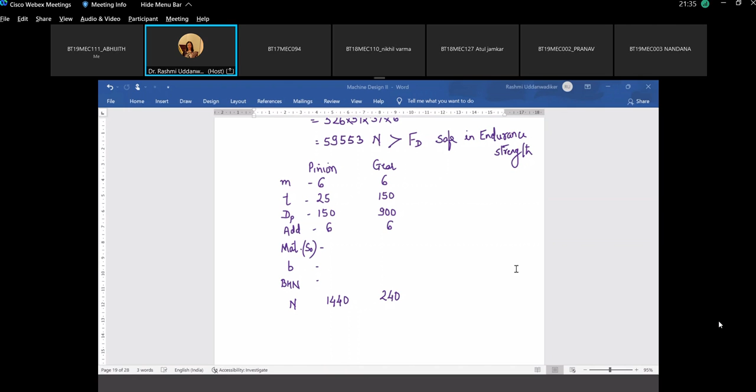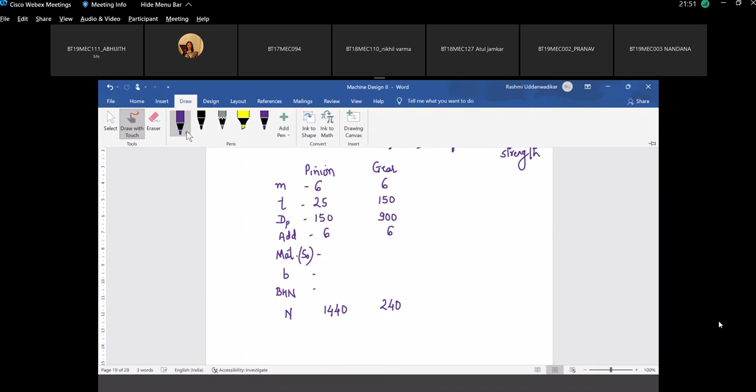Okay, which color looks more prominent on the screen? This indigo, black, blue, red. Ayush, whatever color I'm using, is that okay?

Okay, let's start. Today I want to complete this topic, spur gear design.

If the rating is 45, then will it require power? 42, and will it supply total 45? If the rating is 45 and it supplies, what is this? Although the question is not very clear, the required power is 42 and the motor rating is 45. This is your question, right, Saurabh?

Yes ma'am. Okay, normally for a 45 kilowatt motor, which is the rated power, the design is always done for a little higher than that. We have used a service factor of 1.5, which makes the design power 67.5. This means even if the power required exceeds 45, say 50 kilowatts, it will supply that much power. But 45 kilowatts is something it will definitely supply.

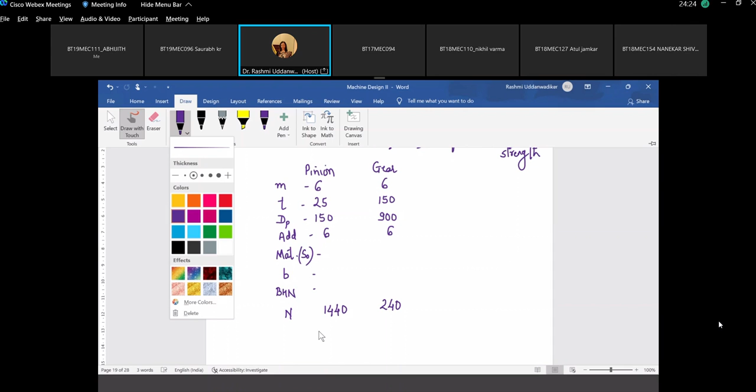To share an example, we were working on an energy audit kind of consultancy for one of the textile industries near Nagpur, at a place called Saoner. They are into the textile business, and their problem was their electricity bill was coming to a few lakhs every month, some 2 or 3 lakhs, and they wanted us to check where exactly the losses were. So we had a team of 3-4 professors, two from electrical and two from mechanical, and we realized they had not changed their motor for so many years. Almost 20 years they had been using the same motor, which means the losses are very high and the efficiency is pretty low.

As per our consultancy recommendation, we asked them to simply change the motor. Now changing the motor will be an initial cost, a one-time cost, but that would save their power by 30%. So 30% saving is huge. And they were saying that they are simply changing the motor windings.

You have studied in electrical engineering that a motor will have a stator and a rotor, and it will have those copper windings. So if that is changed, it is like servicing your vehicle, but it is still an old vehicle, right? You also know that these days on the roads, any vehicle more than 15 years old, the RTO will not give a green clearance. That's because after 15 years of continuous operation, the vehicle, the gearbox, the engine, the belt drives, all the shafts, all the joints will undergo wear and tear, and its performance on the road decreases. The pollution would increase. So it is better to replace that vehicle instead of simply getting it serviced or overhauled.

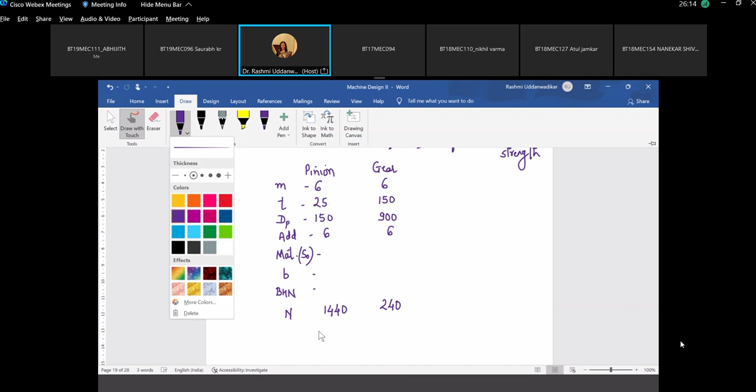Is that clear? Pretty big answer, I guess, for the small question.

So today we are going to discuss the second part of this two-stage gear transmission. I'll go a bit faster for the second part. Somebody is asking - so it will be more like revising whatever we have done in part one, and then we'll design the gear, the hub, and the shaft. This should also include shaft design, which will hold true for belt pulleys also, for bearings also. You have to design the shaft. Well, let's start with the second part of the design for the gear P2G2.

Now I am expecting answers from all of you. Quickly tell me what are the values for RPM available at the shaft.

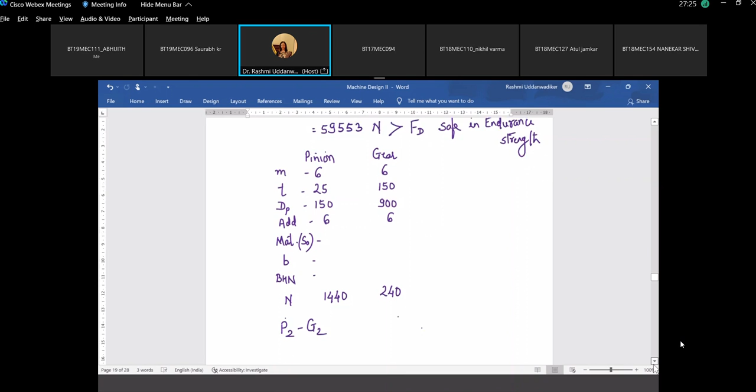We had a motor, and on this motor there was a pinion which we had already designed, meshing with another gear. Here the speed was reduced from 1440 RPM to 240. At the next stage, this was P1 pinion, gear G1, and then you have P2G2 operating a drum, and this rotating drum is lifting the weight.

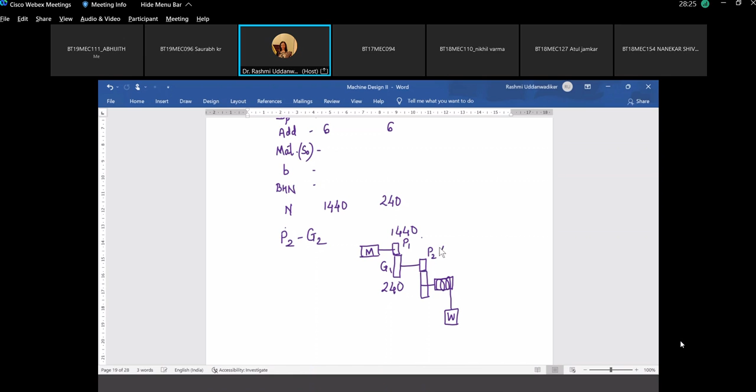So this pinion P2 is again rotating at 240 RPM because it is mounted on the same shaft, and this gear G2 is rotating at 42.4 RPM.

And what is the power available here at this shaft? Whatever power is here, you divide it by efficiency, or reduce it and multiply with the efficiency, 98%. So what is the power available here?

Forty-four kilowatt. The design power available here was- we gave the motor 45 kilowatt, right? This motor is 45 kilowatt. Now we are starting from here.

If this is a 45 kilowatt motor with the service conditions saying service factor is 1.5, what was the PD of this motor in the first part of the problem? 45 kilowatt into the service factor gave 67.5.

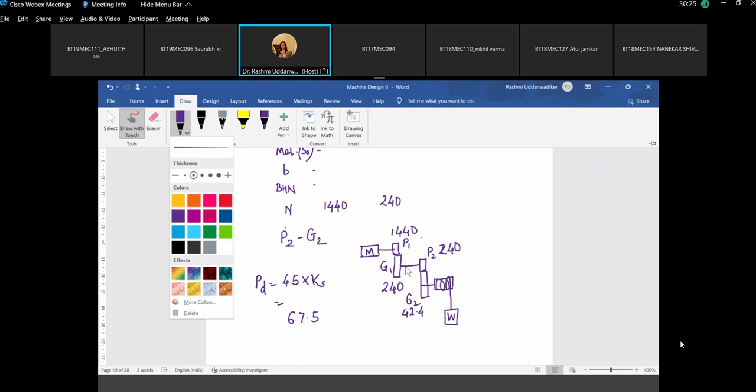So how much would be the losses from shaft 1 to shaft 2 because of the gear drive? What is the efficiency of the gear drive? I told you- what efficiency did we assume? 98%. So how much would the power reduce from here to here? You multiply it with 98%.

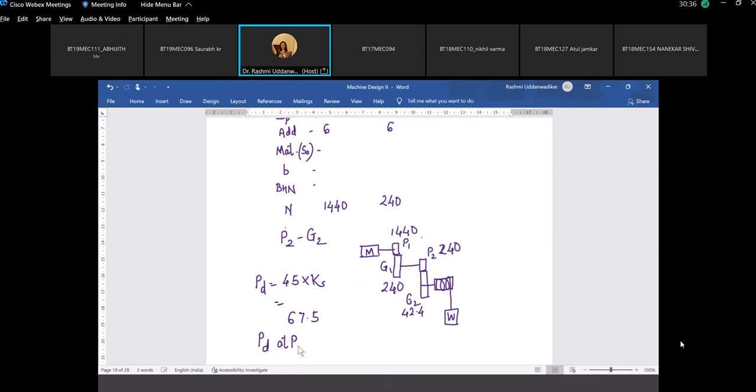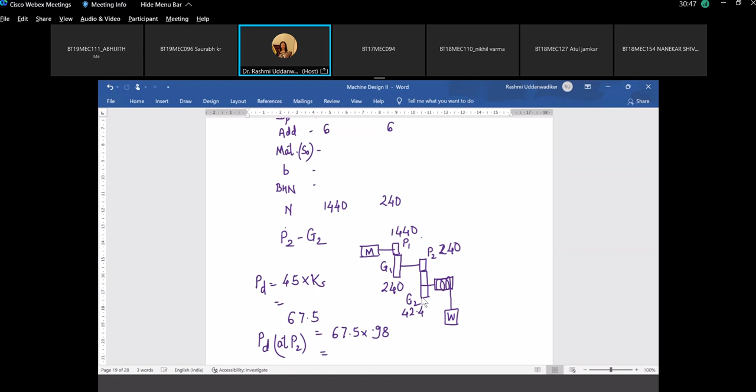So the power available at shaft 2, or at pinion P2- you multiply it with 98% and this would be the power available at shaft 2: 66.1. Should I take it as 66 for ease?

Let me quickly revise. We had some load acting here, and we knew the rotating shaft diameter and its linear speed, from which we calculated what power is required at this drum or the elevator. From here we divided by the efficiency of this gear pair and the efficiency of that gear pair, and we got a value around 41 kilowatt required at the motor.

Since 41.5 is not a standard motor rating, we selected a 45 kilowatt motor. So with this rating and the given service conditions, we multiplied by the service factor and got 67.5 kilowatt as the design power for this motor or the entire assembly.

And since we have designed P1G1 for 67.5, we continue with the same design power. You can slightly reduce it because of the gear drive's 2% loss, so the power available here is 66.15 kilowatt, okay.

Should we proceed from here? What is the next step? Design the pinion. Before that, what is the tangential load? PD upon velocity of this pinion P2. For getting the velocity of pinion P2, we need the diameter of pinion P2, for which we need the module. So let us assume the module is M.

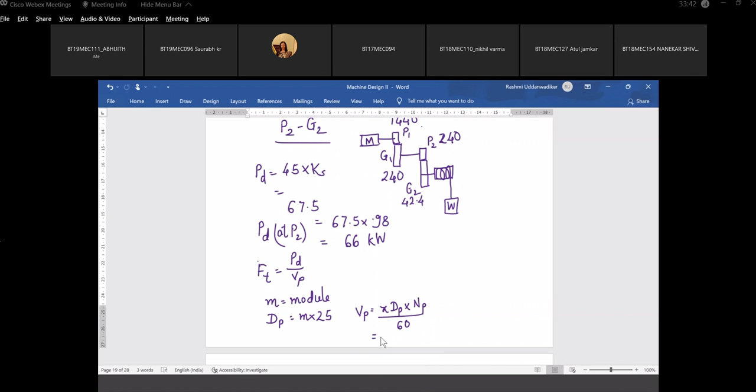So what is the peripheral velocity? RPM is 240, dp is 25m in millimeters. Pitch circle diameter of the pinion into the speed in RPM by 60- this gives 0.314 times m. What is the unit? Meter per second, good.

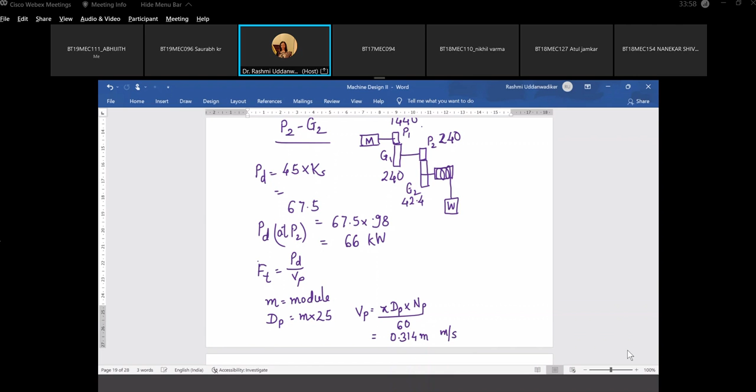Next, give me FT in newtons. PD you know is 66 kilowatt, convert it into watts, upon peripheral velocity. Something by m- give me that something. 211, 210.

Why this variation, if you're using 0.314 and 66? 210, okay, 10 cube.

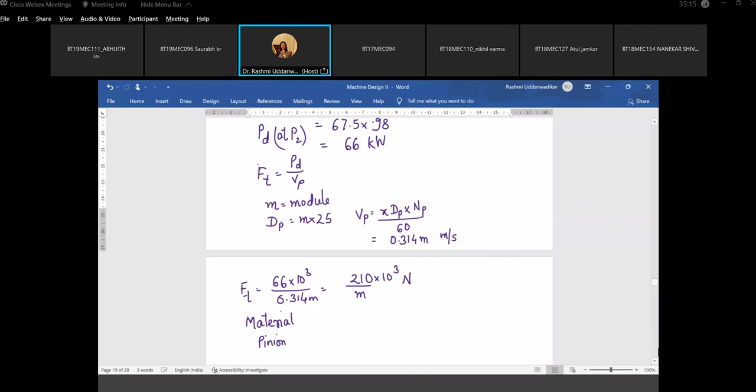What next? We select material. Give me material for pinion and for gear, referring the design data book. We can use the same material as in the first stage, or you might go with some other material. What do you want, same? Same, okay good. So for pinion we used SAE 1045.

Forged carbon steel SAE 1045. What is the value of S naught? 210. And for gear we used cast steel, S naught 196, okay.

Number of teeth: for pinion, number of teeth is 25. So what is the number of teeth on gear? What is the velocity ratio? The velocity ratio is 5.6, which gives number of teeth as 142. Ratio of their RPMs is inversely proportional to ratio of their teeth.

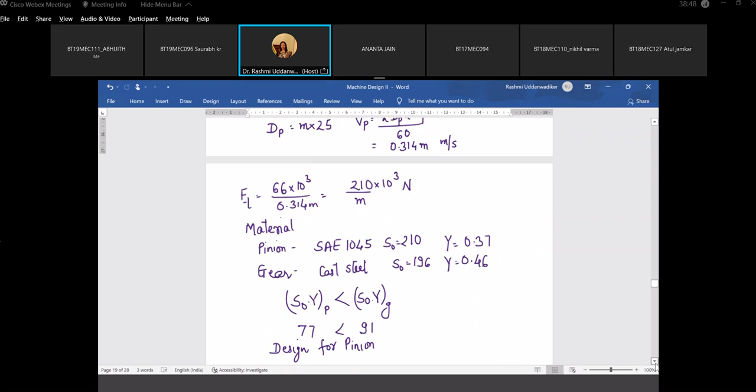What is the next step? Good, 77 and 90, correct? Yes. What is the next step? Once we know that we are designing for pinion, we have to find the beam strength for the pinion. And the formula goes as S naught into Y into B, M and CV.

Value of VP is not known, so we cannot calculate CV, but we can assume CV based on the RPM of pinion. Pinion is rotating at 240 RPM. So by thumb rule, what is the value of CV? If it is less than 1000 RPM, we take CV as 0.4.

Well, and what is the range for B? Range for B is 9.5 times of M to 12.5 times of M, and you can take any value in between, but normally we take 10 times of M. I repeat, you can even go with 9 times of M or 12 times of M, but this is just for ease that we are taking a round figure.

So S naught is known, Y is known for pinion, it is 77. This is 10 M into 0.4. So give me what is FB in terms of M square - something into M square. I'm going very fast because this is more of a revision kind, but the same design we have already done in the first part of this assembly.

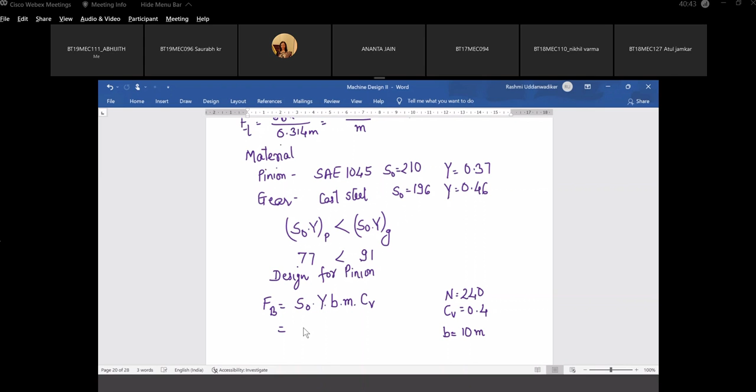Is that 310? Okay, 310 M square, 0.8. What next? What is the next step? How do we get the value of M?

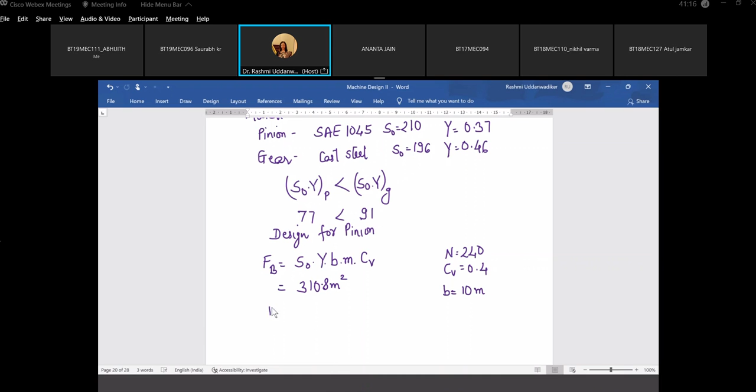We equate FB with FT. FB should be ideally greater than equal to FT. Equate these two terms and give me the value of module.

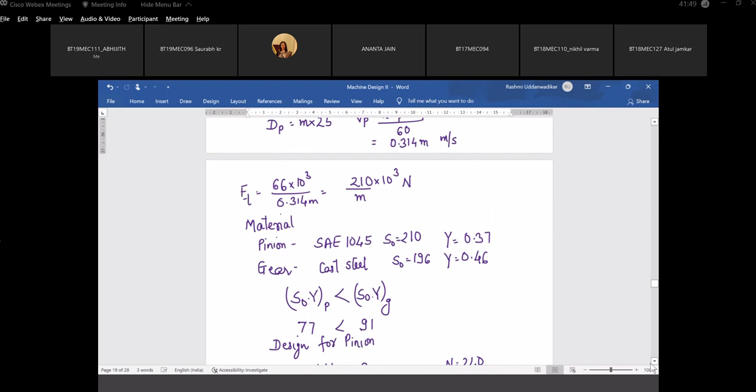FT is 210 into 10 cube by M. Make sure your values are in newtons. So it's 310.8 M square. This is in Newton because this is in millimeters, and this is in Newton per mm square. Equated to 210 into 10 cube. So what is the nearest value for M from the data book?

If M is 8.7, you will get 0.87 if you have not converted kilonewtons to Newton. Sushmita, make sure you are converting the units. So the next value from the preferred choice is 10 or 9. Saurabh? Okay, 10, ma'am. 10. Okay, so from data book, we are picking up M equal to 10.

Now, once this is final, get the value of pitch circle diameter of the pinion. Give me what is VP. Give me what is CV, and give me what is FT.

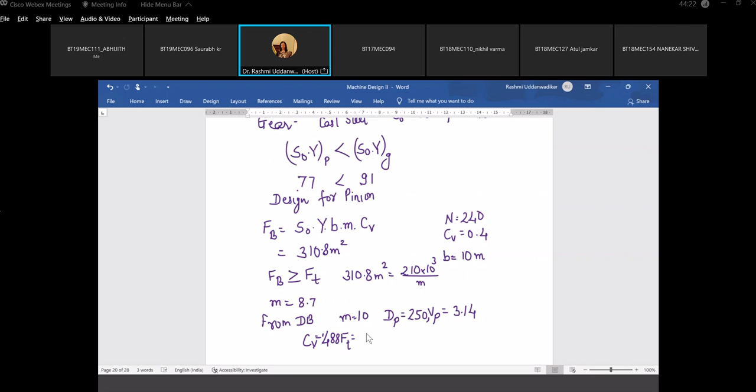Which means we had to consider only the beam strength as 48% of the actual, whereas with N240 we assume CV as 0.4, which means we assume beam strength is reduced to 40% of original, whereas it is 48% of the original. What is FT in newtons?

FT value 21. Okay, so which means your value of FT was 21178. Okay, let me go with Saurabh. This is FT.

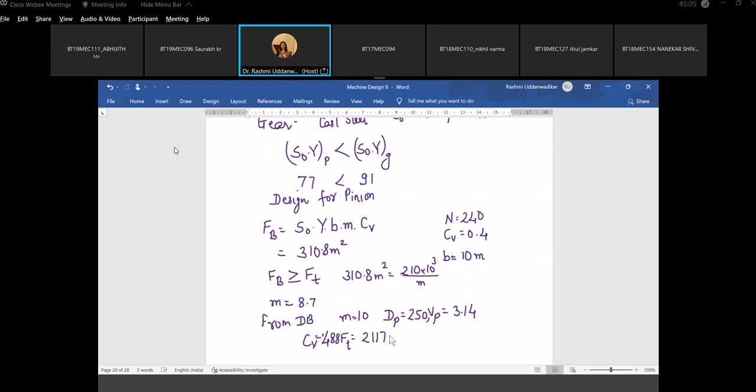What is the next step? What do we check now? B. Good. So now we'll assume FB as this FT.

Which is 21178. S naught remains the same. This does not change. Y remains the same. B we have to calculate. This is unknown now. M value you know. CV is the calculated value 0.488. So this is known, this is known - ye pata hai, ye pata hai.

Give me B, and what do we check from the value of B? What do you check? Whether this calculated value of B is greater than B minimum. It must be greater than B minimum, not less.

Atul, Harshini, Lokesh, I'm not getting answers from you. Okay, so Aditya, your value of B after calculation came out to be how much? 55. Pretty low. What is B minimum?

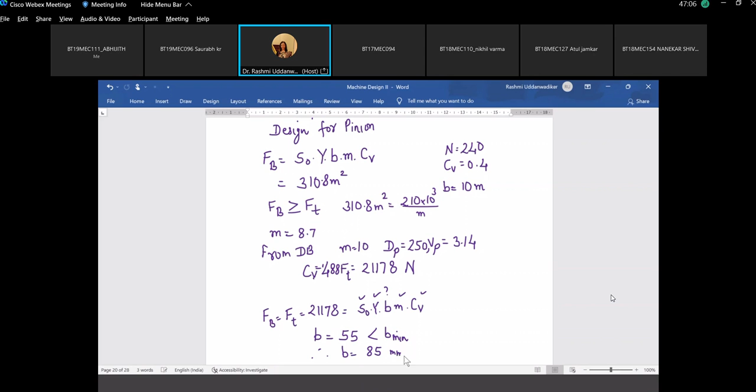B minimum has to be 85. So this is less than B minimum. This will not be safe, and therefore we are assuming B as B minimum, which is 85. We proceed with our design with B equal to B minimum. This value is not acceptable because this is less than B minimum.

So now that you have increased the value of B, which means your FB is definitely greater than this 21178, which also means that now your FB is definitely greater than FT. Now your FB is S naught into Y remains the same. Value of B is increased from 55 to 85, which means FB is also greater.

M is same. So this value is now with CV greater than FT. Give me what is without CV, because now we are going to check with the dynamic load. This is FB sans CV.

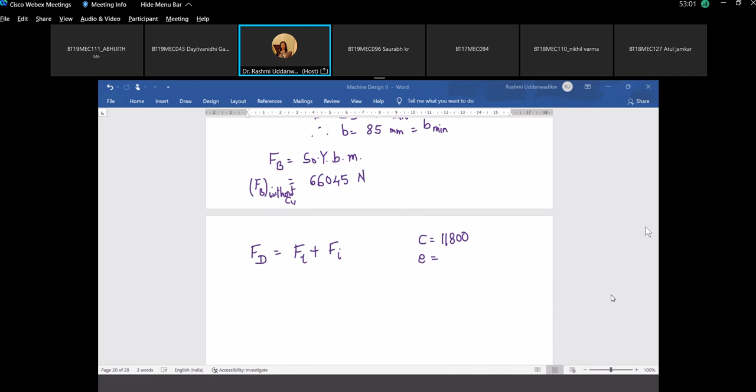What is the value of our velocity? Yes, for CV, we have taken class 1. CV, you have taken class 1. Yes, because the velocity range is lying between 2.5 to 5.

So you understand the meaning of commercially cut - it is done commercially without checking or bothering too much about the errors, and so the error is quite high. Carefully cut gear, as the name indicates, is cut with little more care, and so the error goes down. And precision cut is very precise, and so the errors are minimum.

And what is the permissible error? With class 1 gear, you are getting probable 0.08, and what is the permissible error? 0.1, and 0.08 - this is less.

So ideally, we should write it down as we are going with carefully cut gear. But as of now, let us stick to whatever value we are getting. If it is not coming out to be safe, if this FD value is not coming out to be less than this, then we'll see. Okay, so for now we are going with 0.08 value - probable error 0.08 for class 1 gear. This is what is justified as per the range of the speed.

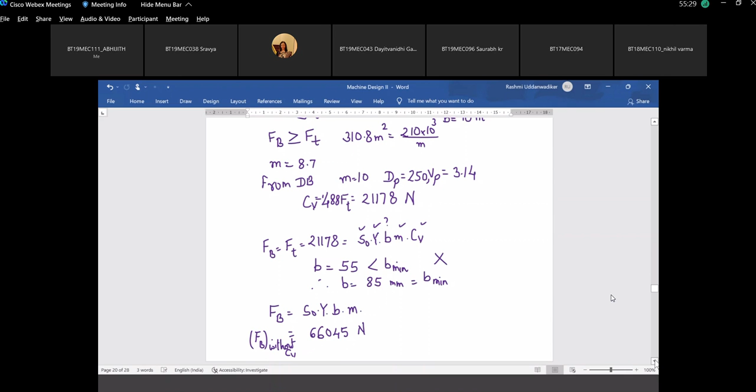So what is FD coming out to be? All we want is it should be less than FB without CV. Probably it is less.

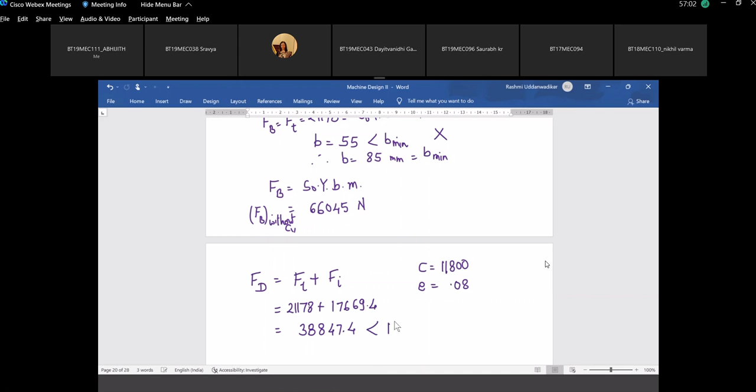Give me FD. 53, oh good. Oh, 88. All of you are getting FD in this range, which is definitely less than FB without CV. This is very important. Here we check it for FB without CV. So this is safe in bending.

Okay, good. You know what is the funny part of this? When you are solving in the class, you will always get safe. When you are doing it in your exams, you will never get safe in first go. So as the joke that goes around in your WhatsApp, what do they teach in class? Very simple model, and what is asked in exam is extremely complicated thing. So it's not done intentionally, but somehow it happens that in first go you never come up with the safe value of FD and FB in exams. It comes in class. So that is good for me, not good for you.

Okay, moving ahead, go for FW. Check for wear, check for endurance. If you can do this in 5 minutes, we can start with the gear blank and the shaft design.

So what do we do for FW? We don't assume K, we equate FW directly with the load and find out the value of K. This is what we did last time. It is the pitch circle diameter of the pinion dp into the face width b into k, which is not known because this depends upon the hardness, into the size factor q, which depends upon tg and tp. So this you know, this is 2 times tg upon tg plus tp.

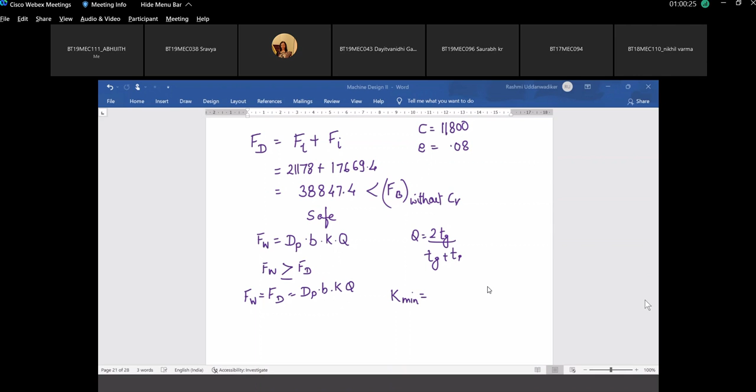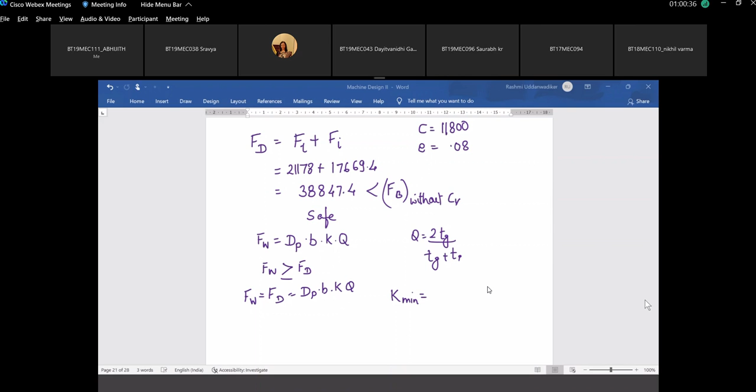K is coming out to be 1.08. Somebody else please confirm. Value of K 1.07. 1.07, 1.08, okay, let's go with this, 1.075. What is the next nearest value higher than this for 20-degree involute full depth? Steel versus steel. What is the next higher value? After 1.07.

20-degree full depth. You are checking for 14.5. Yeah, next higher value is 1.376, which is for what BHN numbers? So from the data book, 300 each, or for 250 and 350. 250 gear, 350 pinion is again giving the same value, or 300 each. So from the data book, we are going with the next value of K, which is 1.376, which will definitely increase your value of FW.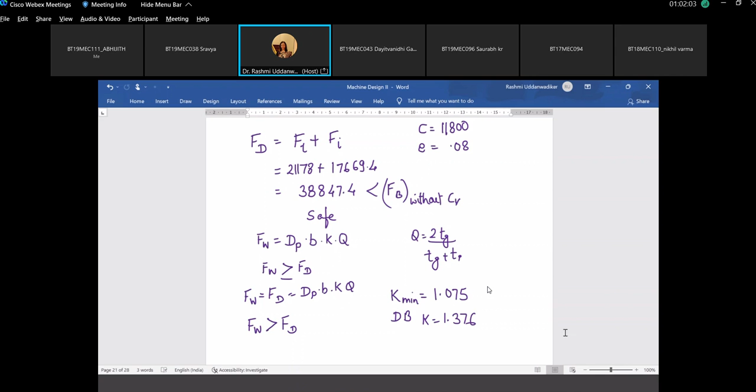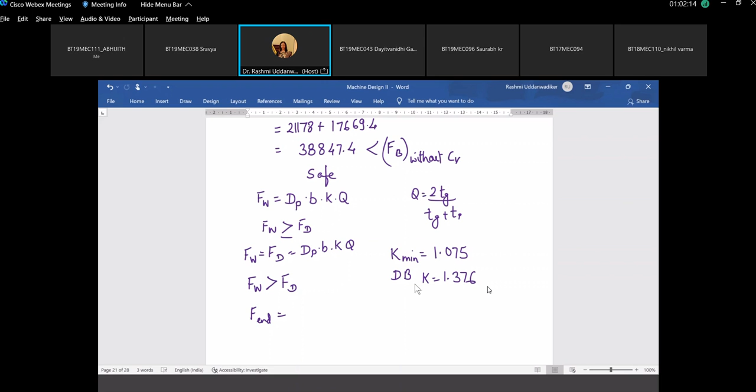This will be greater than FD, because DP is same, B is same, Q is same. K value from 1.07 is increased to 1.37, and so FW is definitely greater than FD. You may check, you may not, this goes with logic. And the last step is F endurance, which again for this value of hardness, where the BHN is 300 each for gear and pinion, you check for endurance and this is going to be safe.

So this part for now I'm skipping because I want to go for the gear blank design. And I have to finish it in next 10 minutes because a few students have requested me to leave the class at least 5 minutes before the next class, and I appreciate that.

Okay, turn the pages, go to the gear blank design. I'm sure F endurance, you know by formula, will come out to be greater than FD. And we say that this is safe in bending, this is safe in wear, and this is safe in endurance.

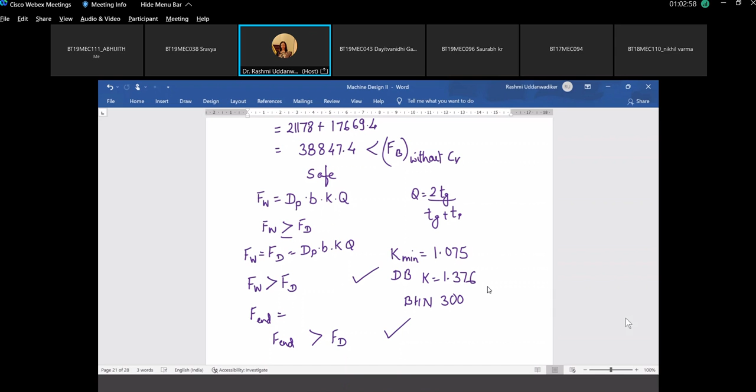Good. Okay, turn to page number 174 as per my book, table 1614. This is giving you the design data for gear blanks. What do you understand by gear blank?

Pratyusha? Vedant? What is a gear blank? Pratyusha is there. Geometry? No.

Gear blank is the solid disc from where the gear teeth are cut. Yes, it's a disc with no teeth. Now there can be three types of construction. One is a solid blank, another is a web construction, and third one is the armed construction. And now what is the difference between these three? Anybody can tell me? There are three constructions given: one is the solid construction, second one is the web construction, and third one is the armed construction.

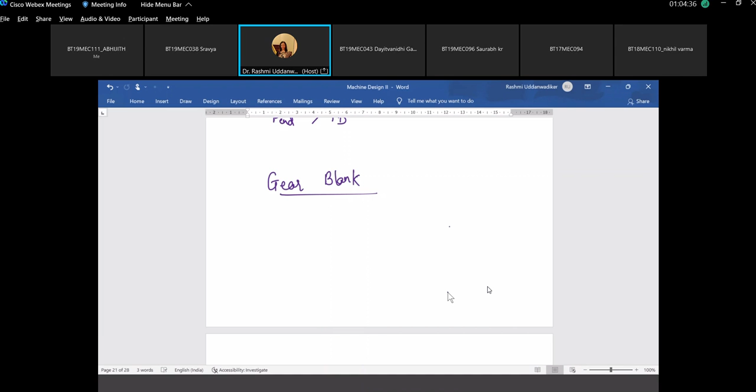Now depending upon what is the size, this type of gear blank is a solid construction and the gear teeth would be cut here on this periphery. This is the web construction. If the diameter of the pinion is of the order of 24 times module plus 80 in mm, or a little less than this, then we go for web construction. If the diameter is less than 15 times module plus 60, we go for solid construction. And what is armed construction?

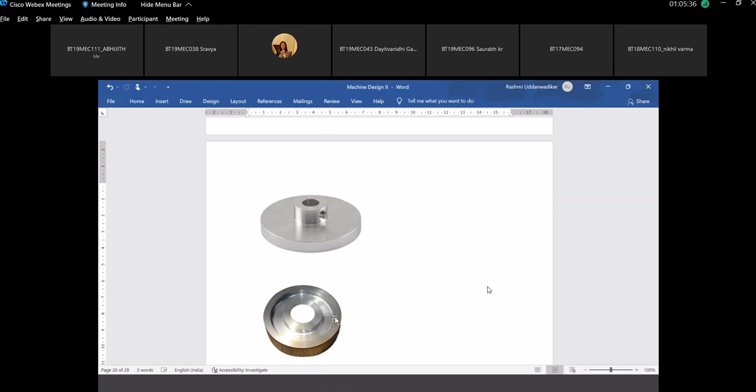What is the DP value given in the data book? Siddharth? What is the value of DP given? Pitch circle diameter for armed construction?

Are you referring to the design data book?

This kind of blank is known as armed construction, where this much amount of material is removed and you simply have arms instead of a solid material here.

And what is the advantage? Another probable question: when would you go for a web construction or armed construction? What is the advantage of armed construction over the web construction? As you can understand, with armed construction there's a reduction of cost, a reduction of material. That is the benefit. But when do we go with this?

If your gear is too small in size, the diameter is as low as less than 15 times of module. In our case, module is 10, so less than 15 times is only 150 mm, which is only 15 centimeters. If this is the size, then cutting arms on this small size will be costly. But for a huge diameter, almost 240 mm, 250 mm, there will be even more saving. There is pretty much saving of material. But if in a small gear you are trying to remove material, then manufacturing becomes costly. So for smaller diameter, solid construction is preferred; for larger diameter, we prefer armed construction.

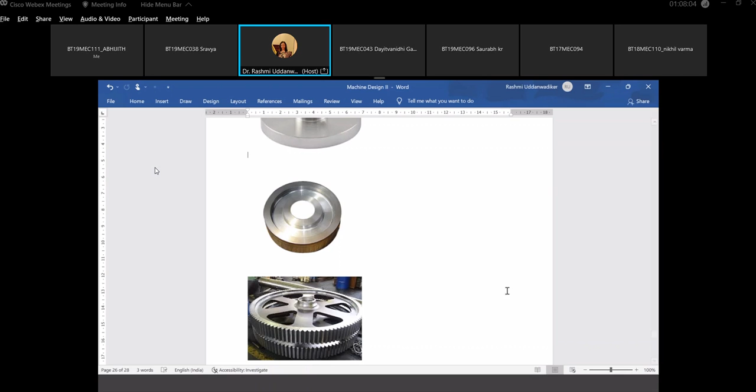We normally design the shaft or the gear blank for the gear which has the largest diameter now. Currently 250 mm is the diameter for the pinion. What is the diameter for the gear?

142 teeth into 10 mm, correct? Yeah, so the pitch circle diameter for the gear. Now we are designing it for the largest of the 4 pinion-gear combinations, and the largest one is having 142 teeth with module 10, giving 1420 mm diameter, which is definitely greater than

24M plus 80, and so we are going with the armed construction, correct?

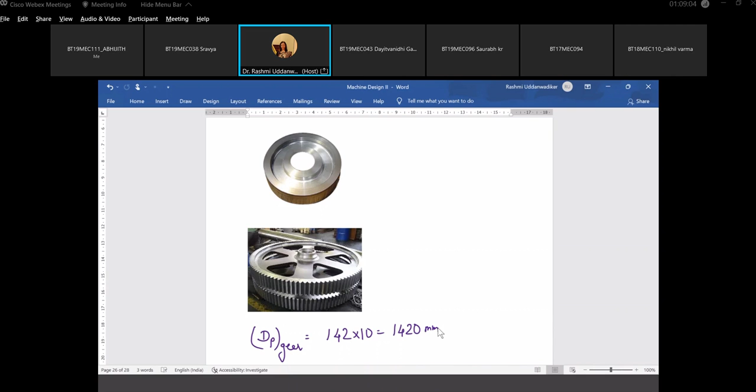And what will be the number of arms for this range of diameter? For the pitch diameter in mm, number of arms are given. So our value is 1420, and so number of arms would be 8, 6. It's given as 6, right? Yes.

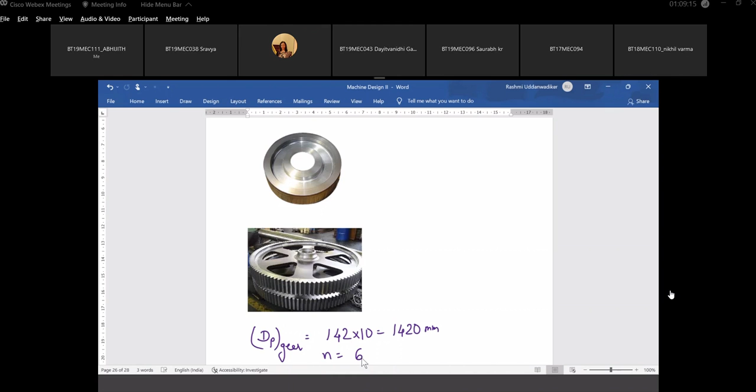So what will be the outer diameter of this? Pitch diameter is 1420, what will be the outer diameter? What is the height of the tooth above the pitch circle diameter known as? Addendum, perfect. So what is the outer diameter?

It is dp plus... will you be adding addendum once or twice? The height increases on both sides, so it's m plus m, that is 2m. Radius will be pitch circle radius plus m, and when talking about diameter, you add that height on both sides, so it is diameter plus 2m, which gives you 1440. Agreed?

Why is it not 1430, and why is it 1440, Pradyuman? Agreed? Good, good.

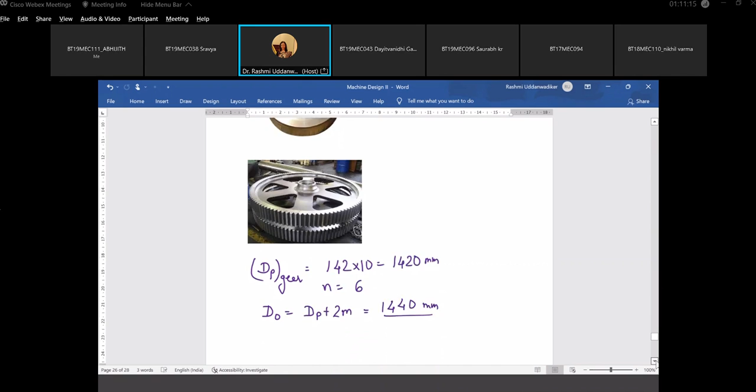Now we have to design the shaft. How do you go with the shaft design? Actually, we'll do the shaft design in the next class. For now, I'll just give you the concept of shaft design. You have to turn to page number 109, shaft design, table number 11, chapter 11, shaft and flywheel. Since the shaft design part is not done yet, I have to take this. Got it? Chapter 11, table 11.1, design of shafts.

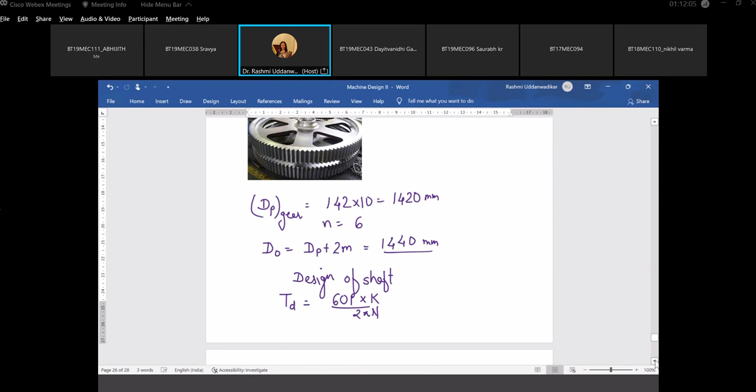Okay, we'll be solving this in the next class, but for now, just go through this design of shaft. It's normally the design torque that we are talking about, which is P by omega, 2 pi n into a factor given on the next page that we can see later. Then for the maximum stress, there are two formulas: one is the simple maximum stress, second is the maximum stress by ASME code, where there are certain factors like KT and KB given, and alpha is also given, where alpha is a factor which comes into role whenever there are axial loads. So we'll be getting axial load in a helical gear design, and when we are going for a shaft supporting a helical gear, then we'll refer to this table.

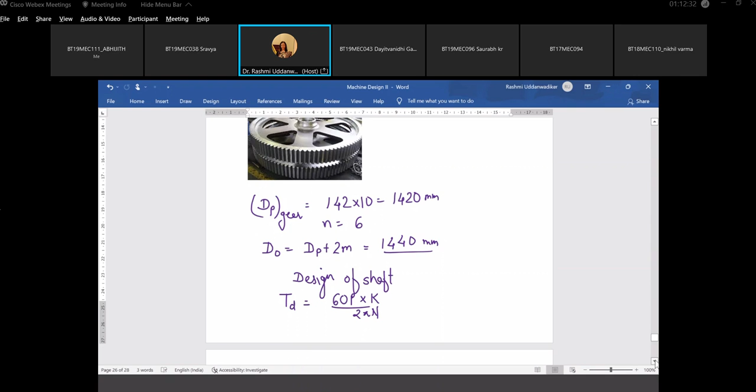Now, for this, we'll be referring to the maximum stress for the solid shaft, which I said will be going in the next class. So the tau max, the maximum shear stress induced, will be 16 into 10 cube by pi d cube under root of m square, that is the bending moment, plus Td square.

This design torque you know, because the power for which the shaft is designed you know, and the RPM of shaft you know. So TD you know. How will you get M?

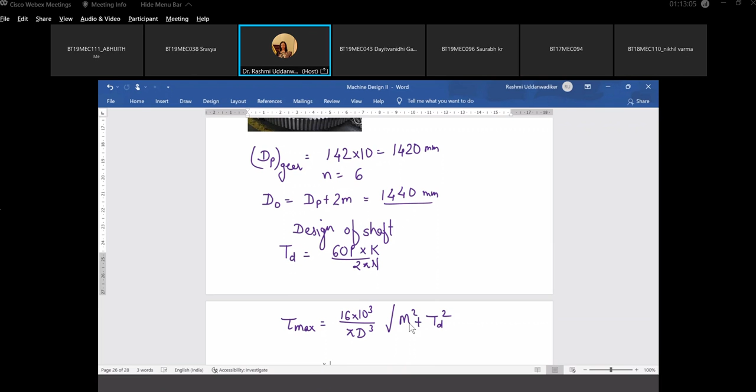Bending moment. Suppose this is the shaft which is carrying a gear and it is supported at two bearings. There might be another gear here. Now for this particular gear, it is subjected to a radial load Fr and a tangential load Ft, which is responsible for power transmission. So this Ft is responsible for creating this moment and Fr is loading it in the radial direction. You must also know the length of the shaft and where the bearings are.

From the bearings, we calculate the reaction, and from the reaction, you calculate the shear force diagram and bending moment diagram, which you have already done in solid mechanics. So that is how you calculate M and TD, and from M and TD, we assume what is tau max for the material, and we find the shaft diameter.

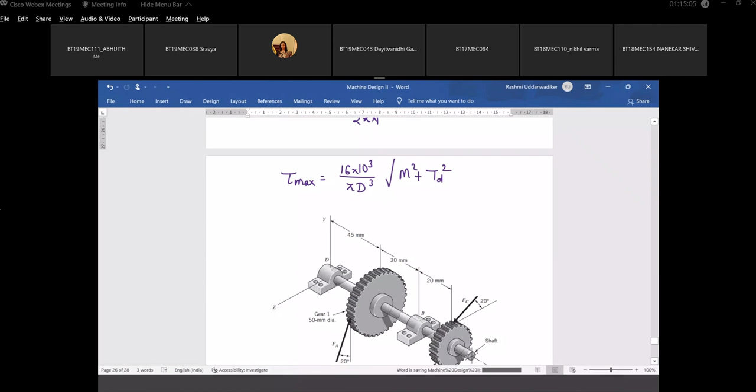Which textbook to refer for solving questions? The book that I am referring for solving questions is Design of Machine Elements by B.D. Shiwalkar. Other books like Machine Design by Shigley, Machine Design by Thomas Bevan, which I am referring for the theory part, you will not get any numericals there. So any other design book, machine design book by an Indian author is okay.

Wherever you will get a number of solved problems, each book will have a different approach of solving numericals. I would suggest you to follow this step because this would be the easiest and most precise one. Refer any book and you would get a similar kind of answer.

Till 2017, Professor Padole was teaching this subject and I attended his lectures for 2 years and then I started teaching. So I am following word to word his method of teaching or his method of gear design. And so you can safely rely on this particular procedure which is given in B.D. Shiwalkar.